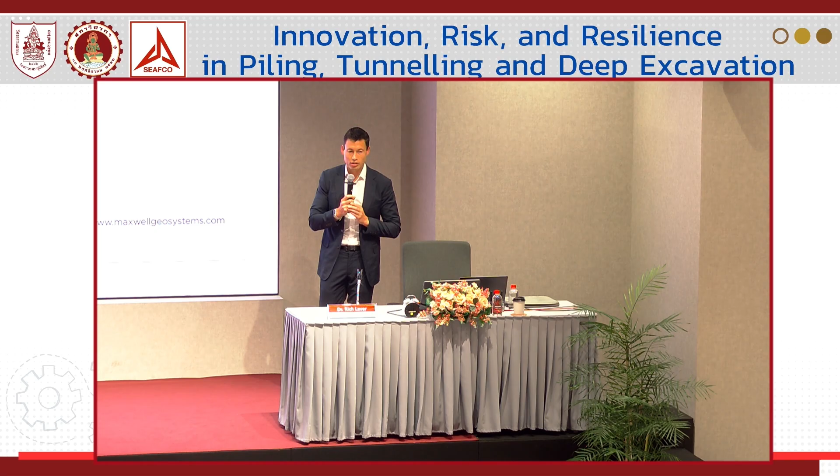I'm sorry, but you said you had zero tolerance for error - was that right? Incorrect data. Yeah, incorrect data. I can't contact you because on the left-hand side of the screen it says richlaver@maxwell.com, and your card says rich.laver@maxwell.com. I can explain that - when I first started the company, they set up my email wrong, but rather than give me a new email, they set up a forwarding one. So both will get there, they'll both work. Yes, they will. Good spot.

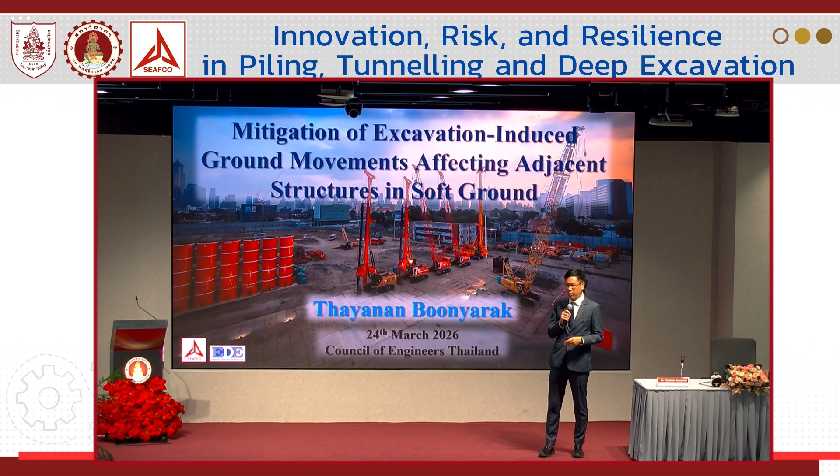As you listened to the very wonderful presentations this morning on monitoring, AI, and so on - this one will present how we could reduce excavation-induced movement on the wall and adjacent structures. Here are some of my contents. I won't read them all, as I have a lot of slides and need to fit them within 25 or 30 minutes to keep you away from very bad traffic.

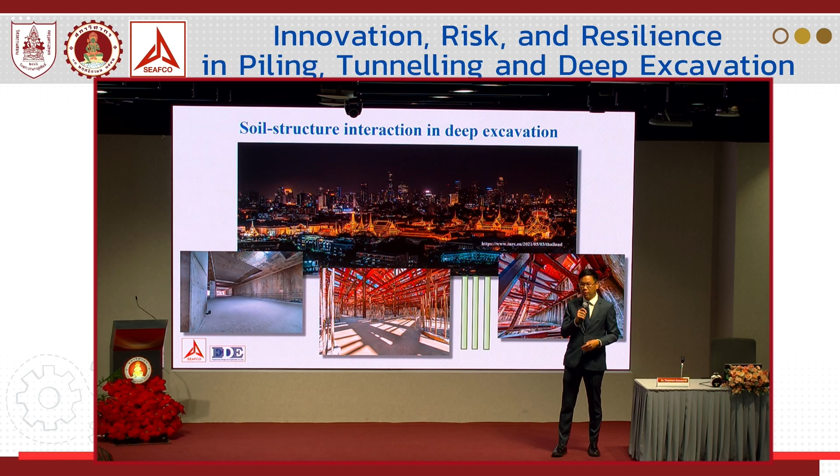Here's a typical construction in Bangkok, whether we do bottom-up on your left or top-down on your right. As we can see, Bangkok and many cities are very beautiful on the surface, but it's a philosophy that we try to make everything become very messy underground. Soil-structure interactions always happen when the superstructure or any other underground structure is built first. When you have any changes in stress, it causes ground movement, which affects the other structures through stress change.

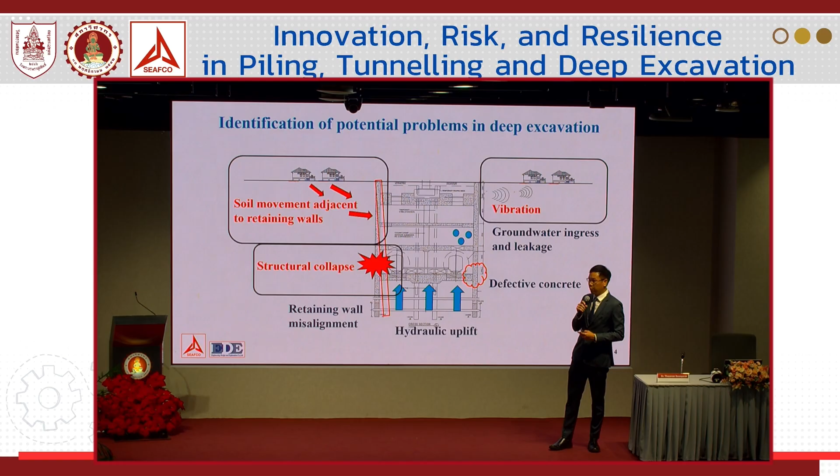So I have listed some possible problems on deep excavation. Actually, they are from large to small. It could be worse, like we have seen in recent years for structural collapse, but I won't be talking about it today. It's still too hot to talk. We will just wait for it to cool down a little, like what we have seen with Singapore Nicoll Highway. It took 10 years for them to release a report. So for the recent case in Thailand, we may just need to wait for some years.

And there is some soil movement close to the retaining wall that would affect the buildings. Some misalignment of retaining wall, but I would not talk about it. Hydraulic uplift: Professor Nopadon already gave a lot of information about that, and Kunarong already presented about concrete in diaphragm wall and bored pile. So I will just touch a little bit on vibration. It wouldn't cause a structural failure or any cracks, but this kind of small thing could make people stop you from working. They would just make noise on social media, go to the district office and stop your work easily. So even a small thing I would like to emphasize today.

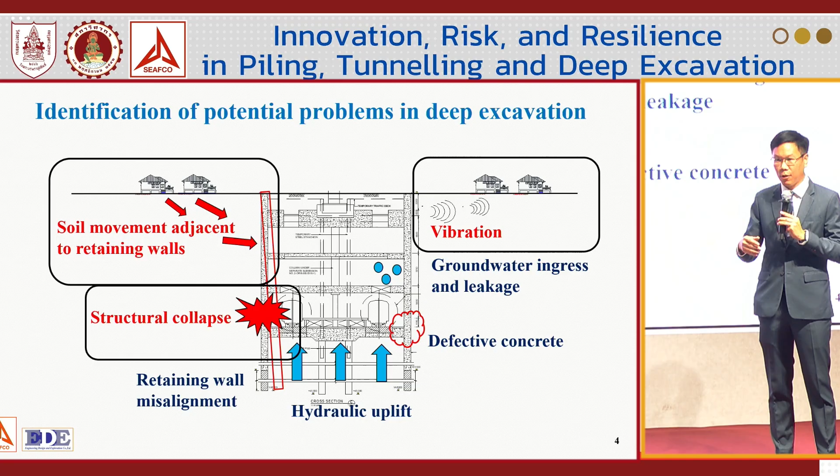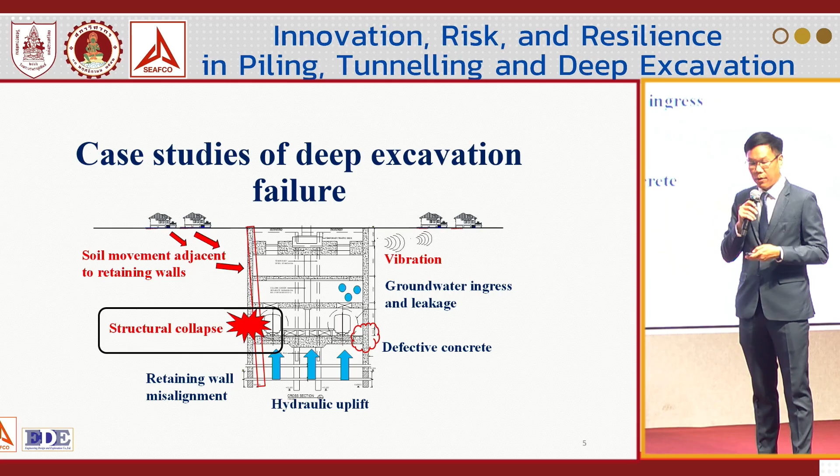So we will go for the very obvious and very dangerous one, structural collapse. It's not like every year's incident, but it still happens from time to time. To start with very early days, that was in 1997. Maybe there are young engineers here; some of you were just born. It was one of SEAFCO's projects. Kunarong may be a better person to deliver this information.

So SEAFCO was the one awarded to do the diaphragm wall to make a shaft for a pumping station. The shaft was constructed almost circular, but with a polygonal configuration. That means it's not a closed loop excavation, not like a normal shaft like Professor Nopadon presented, where they do the caisson thinking that there's hoop stress to transfer. So in this irregular shape of excavation, there will be a compression force acting on this edge, on the circular one. So they used temporary struts as the bracing system.

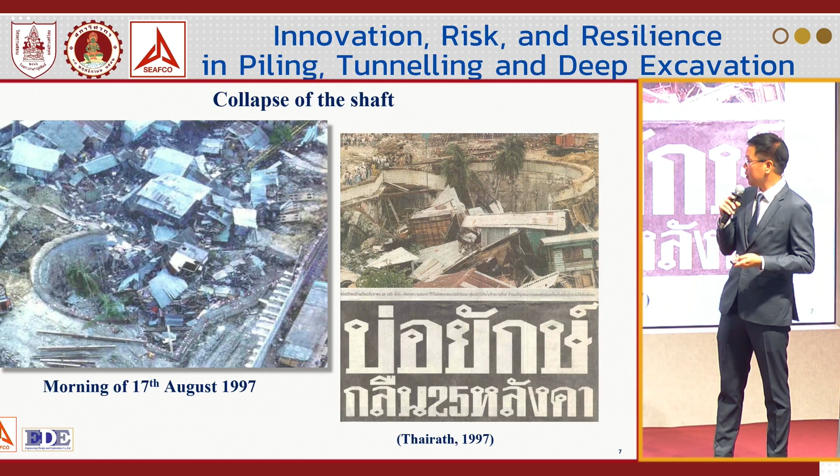This is what happened one morning, 17th of August 1997. I learned from Kunarong that nobody died, right? Nobody died because the people here had just left their houses to go to work, and then it happened very fast. So 25 houses were buried underneath this pumping station, which was almost completed. At that time, a previous engineer who worked before me, Kun Bin, and Professor Pornpot went to the site. After that incident, there was an investigation. Many people tried to blame SEAFCO, saying the diaphragm wall was not good enough. So we traced back what really happened.

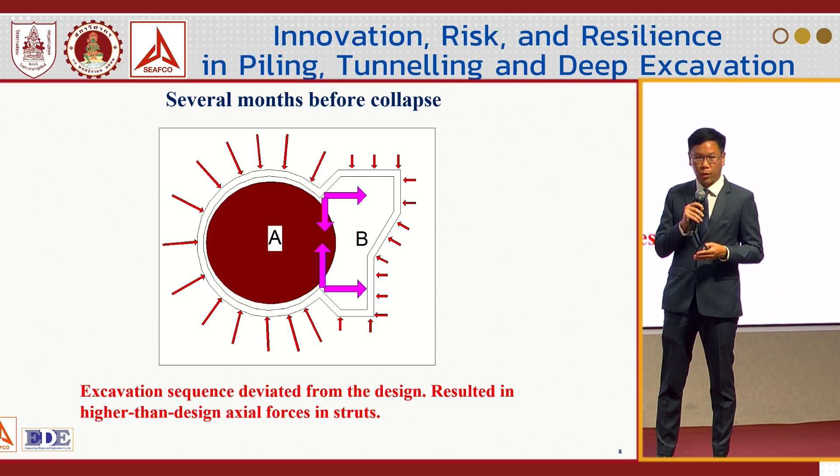Several months before the collapse, the excavation was designed to be excavated uniformly on both A and B sides. But as a typical excavator or contractor, they would do the easiest one, or the one they could excavate faster to gain production in order to claim the money. They are measured by volume of excavation. So instead of excavating A and B uniformly or in parallel, they focused mainly on the bigger pit. This caused the hoop stress to exceed the original design. When the B part was still full of soil and the A part was excavated deeper, the force acting on the strut was already much larger than the design.

And the worst thing was there were supposed to be 10 layers of struts. But on this day our former engineer went to the site, took this photo and found that the excavation had already reached the final depth. We can see this is sand, and there are coupler connections for the wall and slab connection, exposed already. And we found that 3 layers of struts were missing. So with the wrong sequence of excavation and 3 struts missing, it was all overstressed and it just happened. They might call it bad luck. People might think they were designing with a factor of safety like 1.6 or 2, but probably they used it all up, and then the collapse happened.

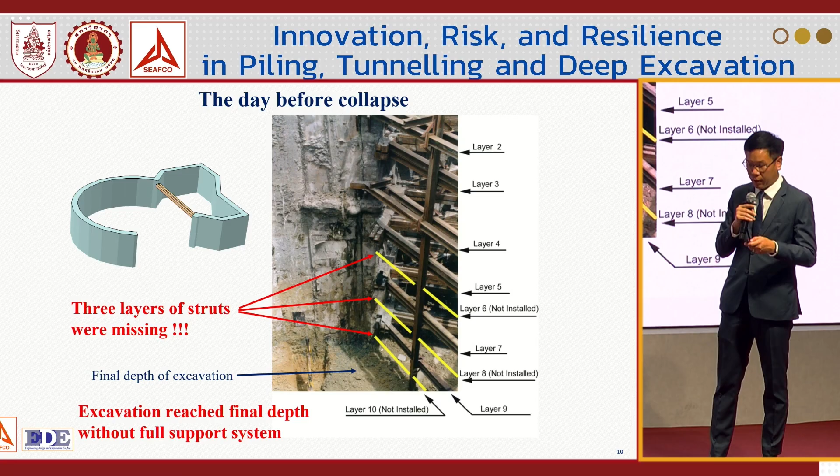And what we learned is: for any modification, just ask the designer before proceeding to anything, and ensure the proper installation of the struts. And really use a robust monitoring system, really use the data, interpret it, and see that it's a warning. I don't want to mention many projects in Thailand, but there was a TOR to read the monitoring system and the data, and they just leave it in their drawer forever. So if the engineers there really tried to foresee the problem, this wouldn't happen.

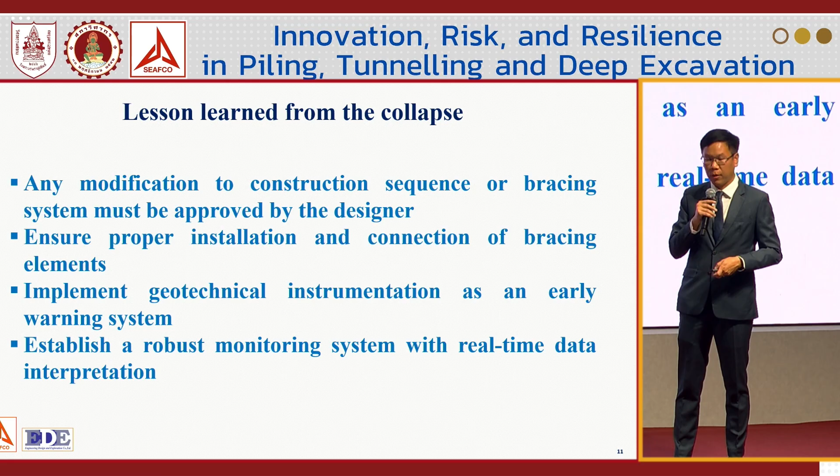And I move from a very long-term project to a recent one. This happened in China in 2019. So not just COVID happened in China, this happened too. It was a deep excavation in Nanning, China. The construction was excavated using soil nails on 4 sides.

The 3 sides looked okay, no sign of excessive movement, but this kind of problem happens, and they discovered the sign of the failure just one day before. A wide crack of 0.4 meter was observed only one day before the collapse, so that was too late. One day means they have to evacuate people and just hope that it doesn't extend too far.

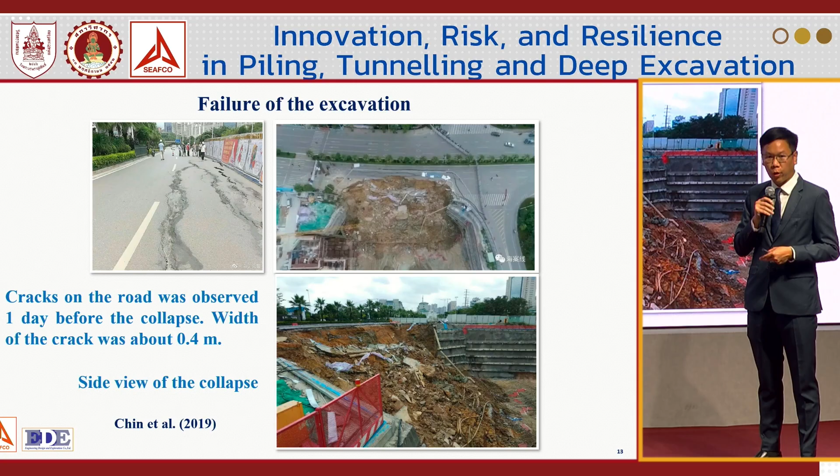So this is what happened. The municipality assigned, I think, a very advanced team of Chinese academics, with Professor Chin as the leading investigator. They came up with a report, I think within 1 year of the excavation. They found out that the excavation was done in sand, mudstone, and siltstone. Looking at the geology, it's supposed to be strong enough to withstand the force using the soil nails.

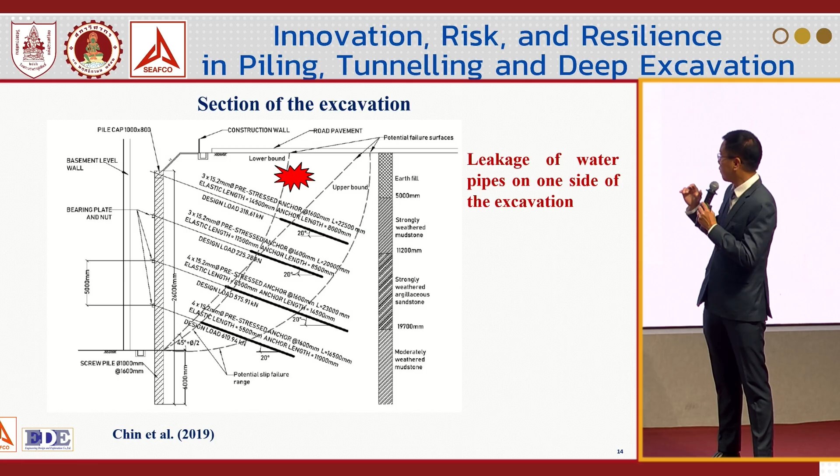But what happened was there was a water pipe that caused a very huge leakage. And that leakage increased the water pressure, and also these mudstone and sandstone, when they encounter water, it caused weakening. Some of the cementation was destroyed by water because some cohesion was apparent cohesion. They are good in the dry or with suction. So once it's saturated with water, the strength was not enough, and these were the expected failure planes.

So what they learned was there was inadequate information on the existing pipe. They don't know exactly, but some movement might have caused the cracks in the pipe, and that leakage from the pipe increased the water pressure and also reduced the soil strength. And with the instrumentation, if they provided it well enough, if they could see the water pressure build up rapidly, they should be able to interpret and foresee something. But once they discovered it, it was too late, only one day.

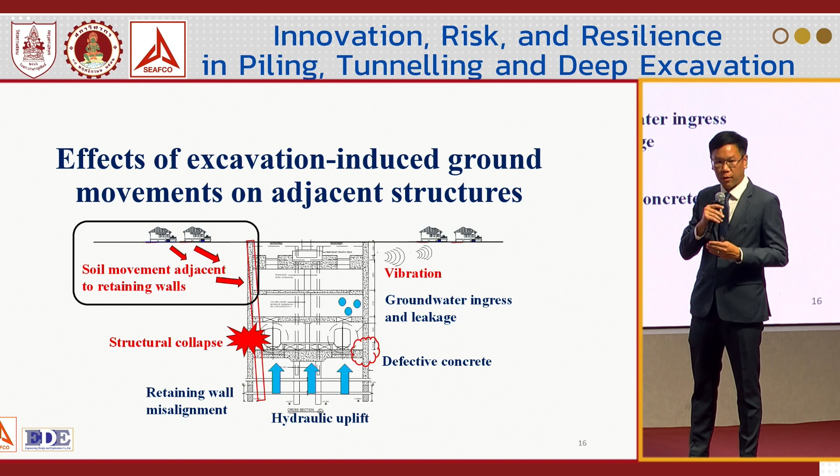So this problem doesn't happen much, but as Ajahn Nopadon and Rich already mentioned, last year we had many incidents of collapse. So I will move to something that happens almost every day: excavation-induced ground movement on nearby buildings. This is one of our projects. We installed some inclinometers and observed some cracks on the wall and also on the floor. That is normal physics.

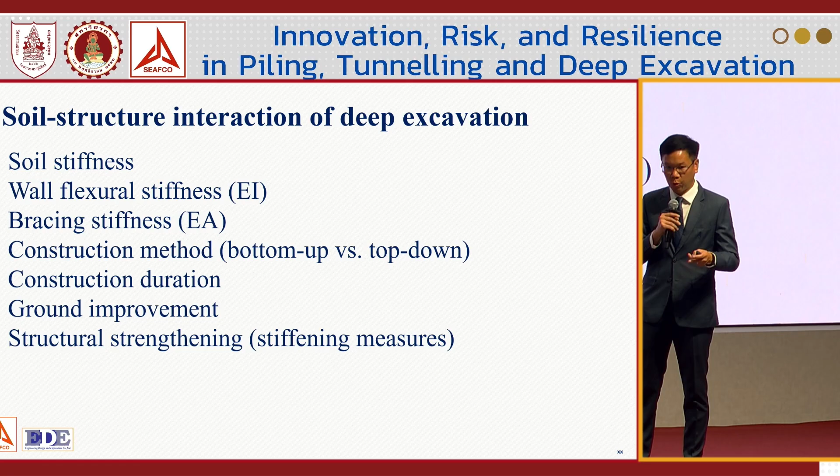When you release the load, you do the unloading, so the pressure is on one side, it's unbalanced, and when you replace it with something weaker, a strut or wall that is not strong enough, movement occurs and that causes further problems on buildings. So these are soil-structure interactions that should be considered, but I won't go through them all. Mostly it's soil and structure stiffness, how they interact with each other, and the method of construction we select. We can even strengthen the existing structures to prevent collapse or cracks, or do ground improvement. I'll go through some of these by showing some examples.

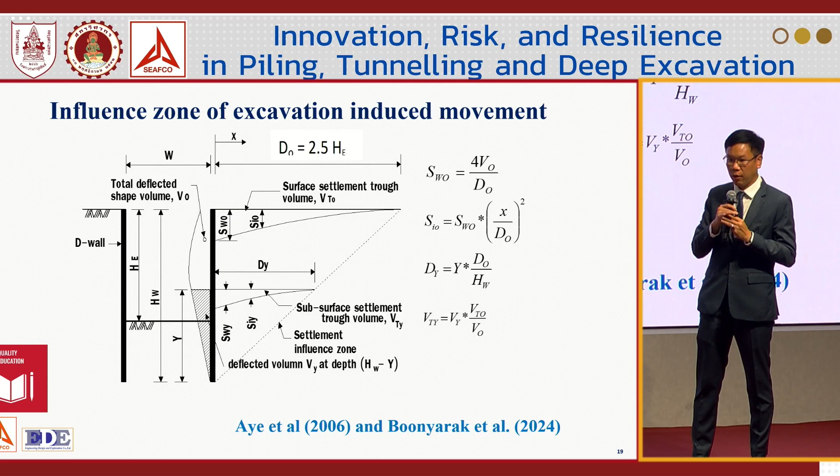As Kun Saw presented this morning, this is the influence zone of excavation, which extends about 2.5 times the excavation depth. And according to the DPT, the Department of Public Works and Town & Country Planning, any buildings within 3 times the excavation depth have to be monitored and calculated for the effect of excavation on the nearby buildings.

For numerical analysis, normally people will check the strength, forces in walls, movement, settlement, and stability for factor of safety. And in order to see what happens on the nearby buildings, we have to model the structures. We cannot mimic the whole building, it might be too complex. We might try to model the major structure like beams, columns, and piles, whether in 2D or 3D. Computation is now very powerful.

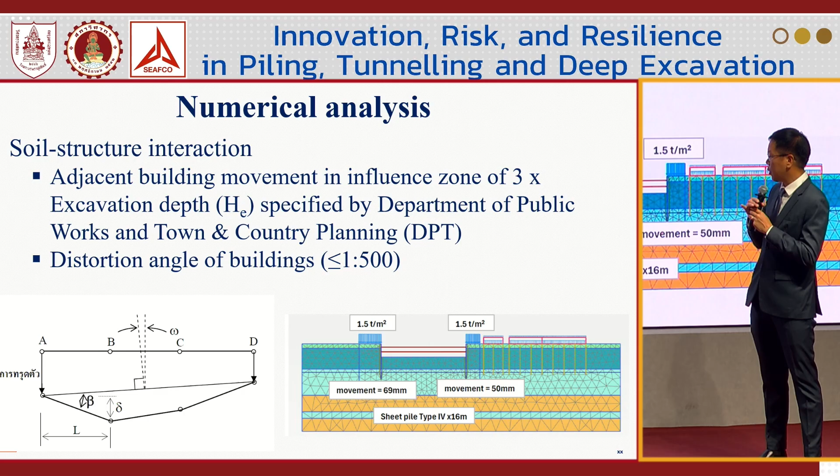Only, we engineers should not be too happy. Once we receive the data from our analysis, or even AI like what Rich just showed us, we have to get some verification of those numbers. And in Thailand, we specify that the distortion angle of buildings cannot exceed 1 to 500.

So once we calculate, we'll set up the trigger levels and also the planned observational method, whether we are going on the danger zone. That means we have to put more countermeasures, for example, reduce the spacing of the struts and do zoning excavation.

Or we are going on the too conservative side, I mean going on the green line, that we know that we are too far from our prediction. That means we can relieve some constraints, for example, going faster, or even you can remove some struts if the data really show this way, that you are too far from the design line. So the instrument is very useful for a geotechnical engineer.

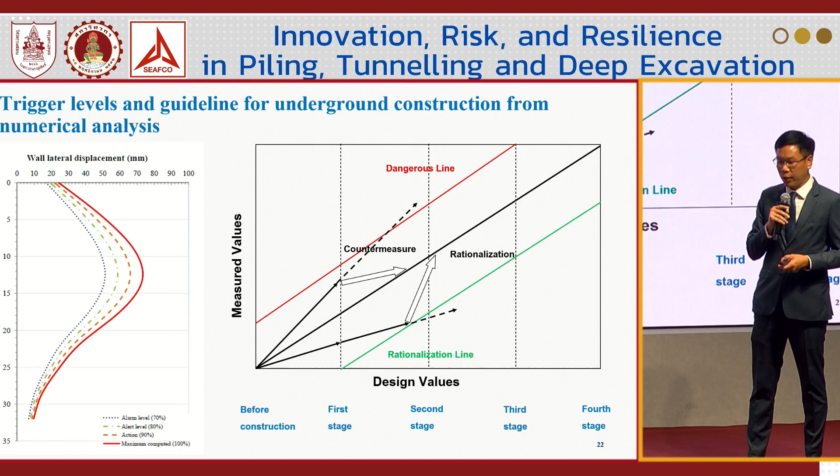There are not too many projects in Thailand, that I don't want to mention, where they just read those instruments and put them in the drawer. Actually, it helps us to verify the field performance and ensure safety. And when you have to go to the court, it really minimizes the dispute among the stakeholders, whether those houses will blame it on you or on whatever else. So that instrumentation can be very strong evidence. I mean, if we are doing something wrong, of course they have a right to sue us.

And I will show some of the data analyzed in a study between 2010 to 2022, where we collected the data from more than 50 projects, mostly diaphragm wall, because SEAFCO is mainly working on diaphragm walls, so we have a lot of diaphragm wall data. But we are also extending to some projects, like Kun Rong said, we had the Tom Yam Kung crisis. So there were not many projects, so we had to go for other shallower excavations.

So we are presenting here sheet pile excavation, pile wall excavation, diaphragm wall, and some diaphragm walls are very thick, like John said. We had some data from a 1.5 meter thick diaphragm wall. That was for a subway station. And we have data from bottom up and top down, but I won't go into all details as time is limited.

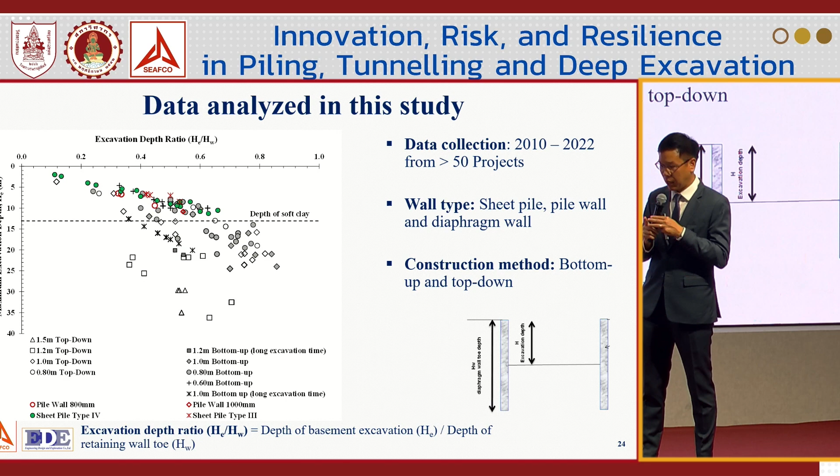So as we might already be able to predict, more rigid walls will end up with smaller movement. That is a normal trend. But I would like to show this graph for our young engineers, that you can use this one for verification of your numerical analysis, whether they are in line.

So from the analysis, the thinner diaphragm wall for rigid walls, anything thinner than 0.8, for example 0.6 meter thick, the movement would be quite large, as well as pile walls. That movement could be more than 0.5% of the excavation depth. That, from literature, is considered rather large.

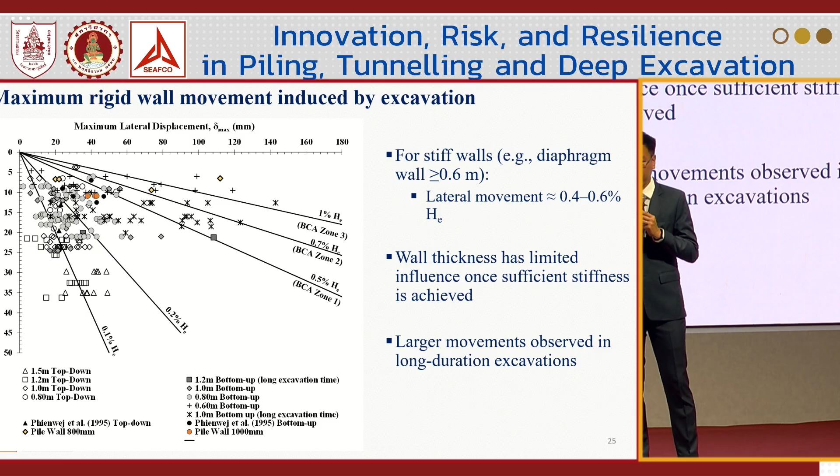And for the wall thickness, once you increase the EI, or flexural rigidity, once the wall is thicker than 1 meter, it doesn't have much effect. And also, there's another effect, time. As we excavate in clay, either soft clay or stiff clay, once you let the wall stay without bracing... there was one project where the excavation was very long, the size of 5 or 6 football fields on plan. So the excavation time was very long, and the span of the bracing was very long. So after you leave the wall for too long, the movement just increases with time as well.

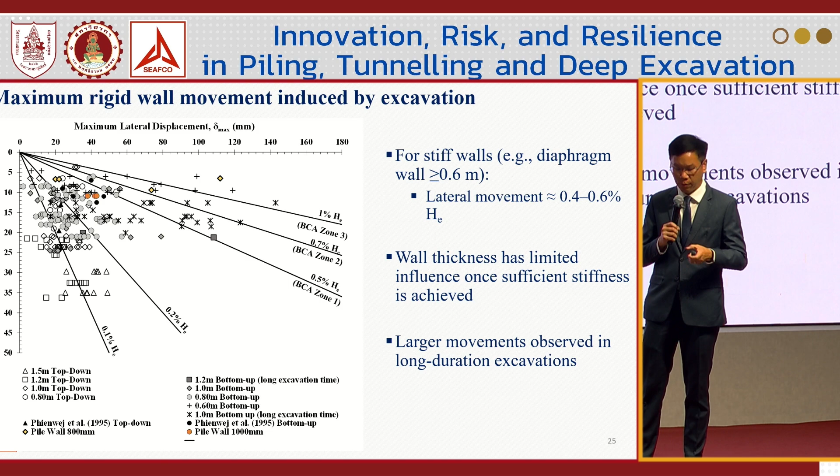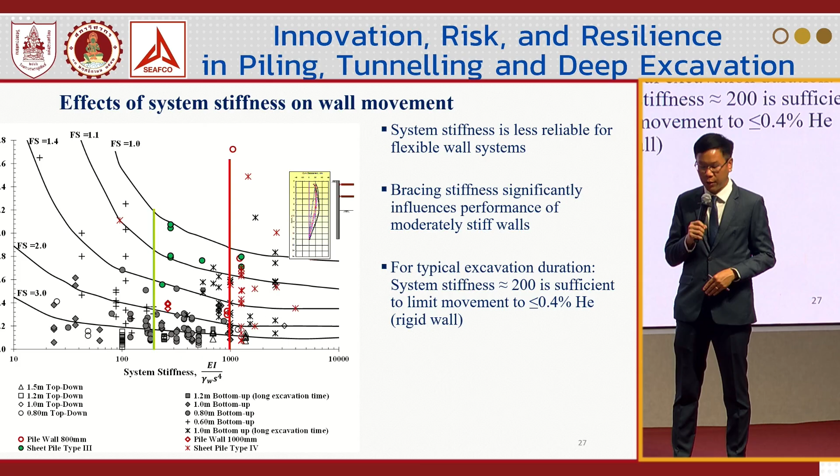And there's one number that people like to use, which is system stiffness. I think it's widely used in the UK, if I understand correctly. It's a good number: the top one is the wall flexural stiffness, EI of the wall. So a thicker wall gives larger flexural stiffness, divided by the spacing of your bracing. So from its physical meaning, it's quite straightforward. If you have a smaller spacing of the bracing, or a thicker wall, you have larger system stiffness.

So what this graph shows you, I will start with a rigid wall. On the low side of system stiffness, once you increase it, the movement rapidly decreases. But once you reach one threshold, from my data it shows at about 200, you are not improving anything. You are burying your money into the ground without getting any improvement. So for a rigid wall, a number of 200 would be sufficient. Anything beyond that is a waste of money and time for construction.

But on the other hand, for a flexible wall, even if we try to increase the system stiffness up to 1,000, we can see the movement, or this line, the factor of safety against base heave, still increase, and you can see the variation of data. So the system stiffness itself originated in the UK, where they mainly use rigid walls, and it comes from stiff soil, not soft clay like in Thailand. So be very careful from this graph not to just use system stiffness for the flexible wall. That varies by many factors, as I mentioned in the earlier slides.

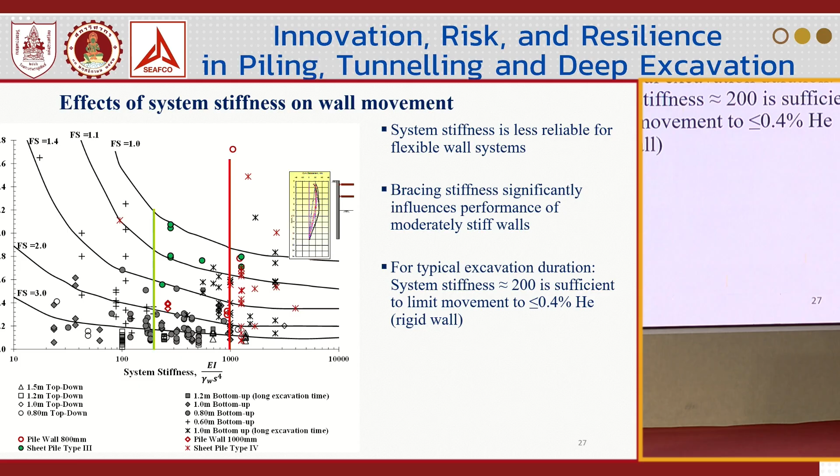And there are some measures to reduce the movement, like Professor Noppadon already mentioned. We can improve the ground. Because once you add cement to the ground, the stiffness increases. Normally, as a rule of thumb, the strength will increase by about 7 to 10 times the original undrained shear strength. And so does the stiffness; normally they go linearly.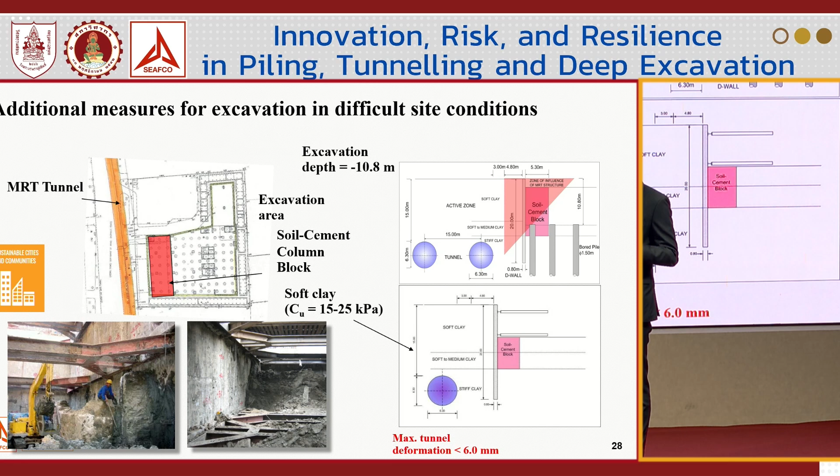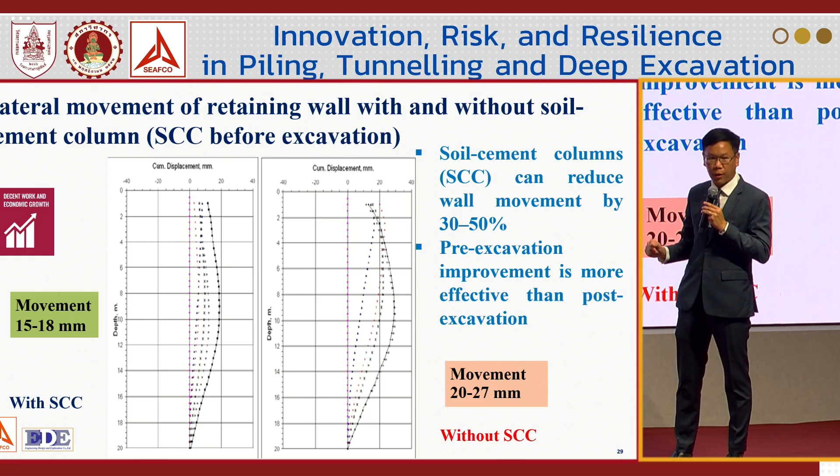We improved the ground with a soil cement column block on the site next to the tunnels, shown by this orange line. So by comparison, on the left is the movement with the soil cement column, and on the right it's without the soil cement column. So from this, we can see that adding the soil cement column can reduce the wall movement on the opposite side by 30 to 50%, given that you do that before the excavation starts.

I'd like to show one example. This one is a bad example, actually. They did the excavation up to a certain level, and they found that there was water leakage through the gap of the diaphragm walls. The diaphragm wall was not watertight enough. Water flow visibly, you can see it flows into the site. So what they did was high pressure jet grouting on this yellow and orange area. And once they did the jet grouting, it made things worse. They opened up the gap and caused a larger wall movement.

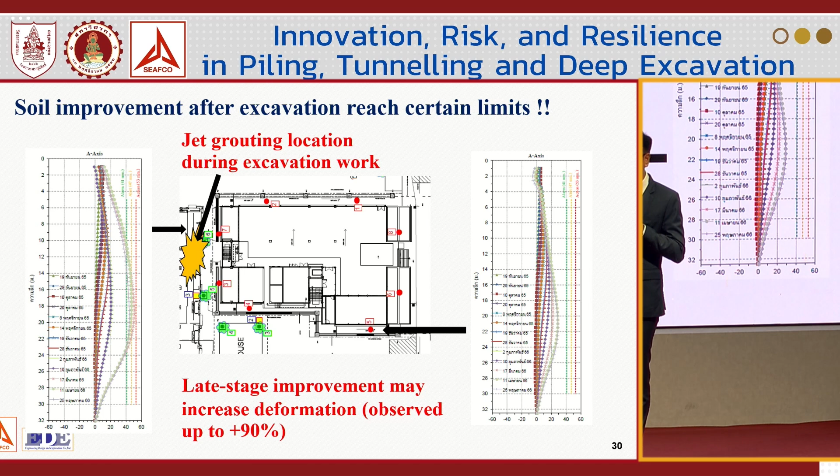So from this one, the late stage soil improvement by high pressure jet grouting increased the movement by as much as 90% compared to the other side without the jet grouting. So just be careful. If you read papers and see soil improvement works, just check the context in which it really works.

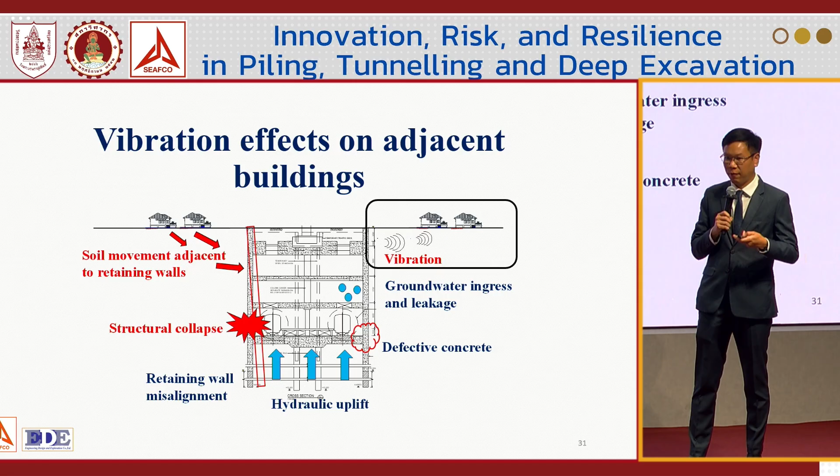And I will move to the smallest damage part, but it could cause big damage if people raise their voice. It's vibration. So in Thailand, there's an announcement of the Pollution Control Department that there are 3 types of building. For certain types of building you have to go through what we call the environmental impact assessment, or EIA, and you have to control your vibration within the limits for each type of building. Type 1 is commercial, so they don't mind; even a large vibration of 20 millimeters per second is still within the limit.

But more sensitive buildings are types 2 and 3: residential, school, and hospital for type 2, and historical structures or preserved buildings for type 3, where they limit the movement to only 3 millimeters per second. And what is 5 millimeters per second? If you see your glass full of water shaking, that's already exceeded, it's very low.

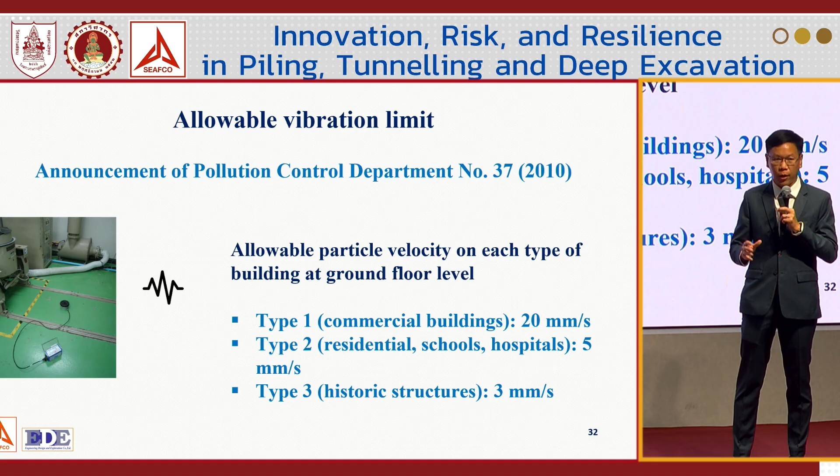So the glass of water on the left, I just took it in my office. So we are a piling office, so we're testing our machines every day. So I'm used to it. So I don't mind 20 millimeter. So what? Yeah, not a big deal. But some people complain. And once they complain, and if they really measure the data, it exceeds 5 millimeter per second of the velocity. So once that happens, they can stop our work.

So we have to find a way. So Kunarong tried to have a new idea to construct, because we are working near sensitive houses all along. If we don't try to do anything, the first option is to go buy many equipments from abroad that maybe cost like 5 million per set. And imagine we have like 50 sets of machines. We have to buy these sets. That would cost a lot of money.

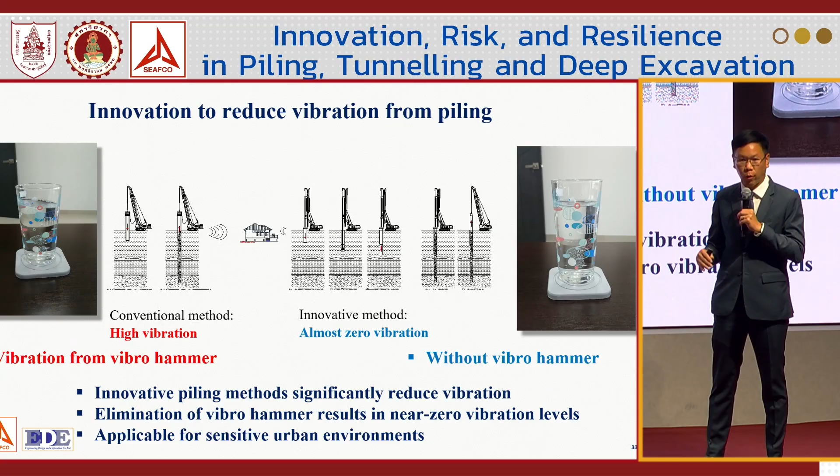So Kunrong and SEAFCO and the R&D team came up with an innovative method. I probably won't go into detail, but we invented the method by not using the vibration or vibro hammer. We do the pre-boring and add the counterweight to nicely push the casing down. And once we invented that, we already got the Thai petty patent, now in use. So we are using this for what we call low vibration piling in Bangkok.

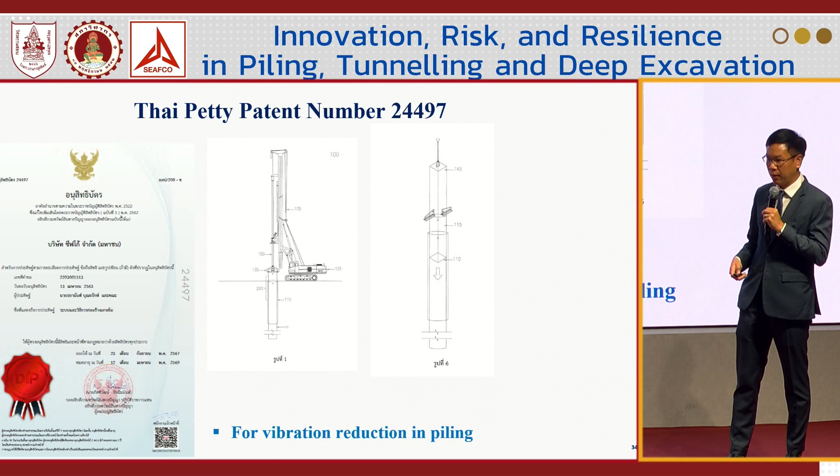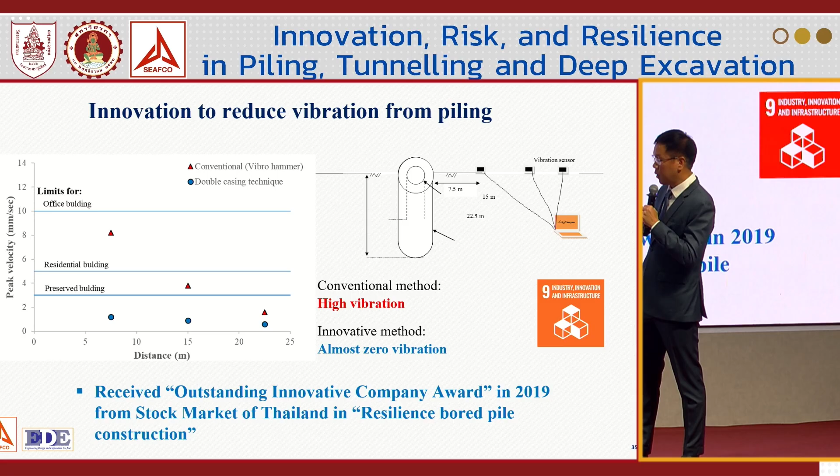And this is a figure to show: the red one was our conventional data that we used a vibro hammer. So it's like a normal hyperbolic curve. Further from the vibro hammer, the vibration gets smaller. But it's a very common case that the piling could be very close to the neighbor, as close as 2 or 3 meters. In some cases we had that problem. So if we still maintained our old method, we would be stopped from working because the vibration exceeds the limits. Once we use our new method, there's no problem after we got these patents.

And others, I will go very quick. Also, even making a diaphragm wall, there's a part that could cause vibration when we want to take out what is called the formwork between panels. In the past, it might take us almost a day or sometimes 2 or 3 days to really take out this, what we call the formwork or stop end. We have to use a lot of force to take it out, and that caused vibration.

I think there was one site that we worked near a kind of clinic. It's an aesthetic clinic, like for facelifts or something. So they are very sensitive.

I even made a joke, maybe we should let our engineers just do some facelifts for them so they will not sue us.

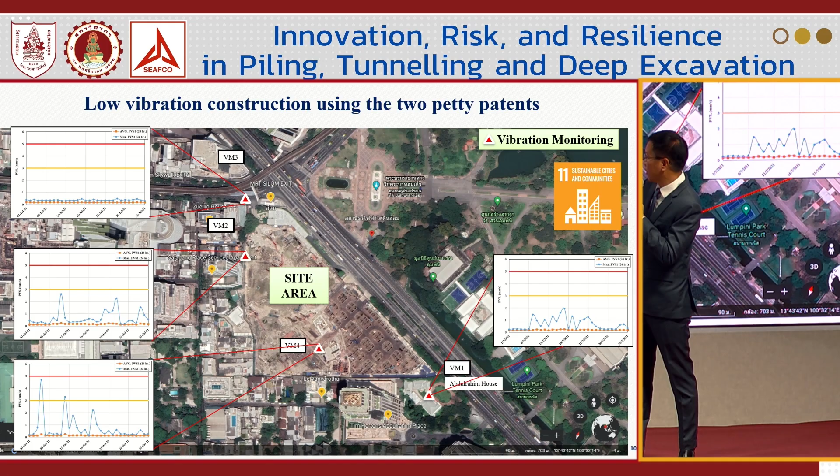This one shows the data in the middle of the site. Some vibration could exceed 3 millimeter per second because we have the trucks, backhoe, excavator running very close to the sensor. But outside of the site, and this one is a historical building that has very stringent limits, all passed the limits that they specify in the EIA.

So I will summarize my presentation. So a robust monitoring system is very crucial, also with timely interpretation so that you can foresee and prevent incidents from happening. And the database of any kind of excavation could be very useful for your future work or for academics, if we share among our society, that could prevent disasters, for young engineers to learn from.

And for selection of the wall type, construction method, and system stiffness, I think we should do the optimization, not go for really conservative, like John said, people nowadays go conservative just to hide away from those uncertainties. And vibration impacts can be minimized using a good technique.

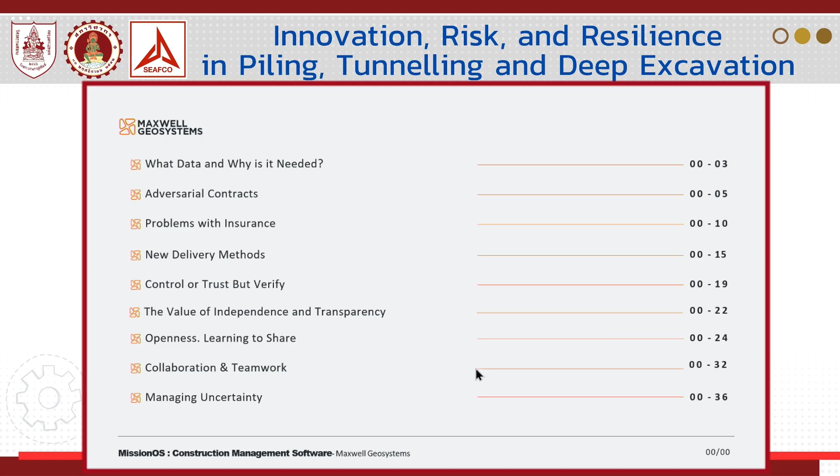Well, what data is all data? We need all data from construction, and particularly we can put this into some buckets. We're talking about the context of construction, geospatial setting, factual geology, groundwater behavior. We're looking at surrounding infrastructure, in particular utility, knowing where they are, knowing what condition they're in, their sensitivity, background behaviors - is my ground already moving or my building's already moving - environmental factors, and then being able to quantify the risk in construction.

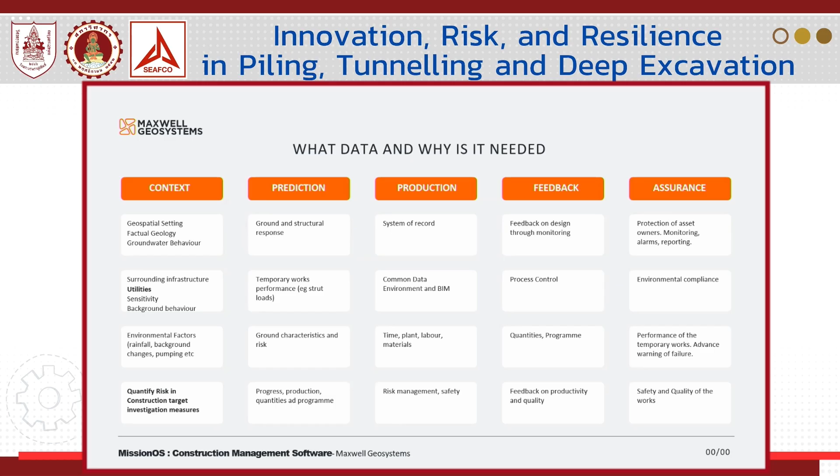And then target investigation measures to make sure we can quantify that risk. We need prediction, we need to know what normal looks like, both in terms of how everything is normally moving, but also what we expect a design to do when we actually build it. And then we need to be able to predict things like progress, production, and quantity, so we can see when things are deviating from our expectations.

And then when we get into production, we need to have all those records, the records as built, and we don't need them done 2 months after the event. We need them done actually at the time of the works, so that we can draw conclusions as to what my expectation was versus the reality, and look at why there's a difference. We need to use this data to feed back constantly on the excavation process, particularly in things like TBM tunneling, which can be very rapid, and also with SCL or SEM tunneling, where things happen very quickly. We need that rapid feedback on the work, not just in terms of design, but in terms of production, in terms of quality. Are we achieving what we said we'd achieve?

And then ultimately, we need assurance. We made promises to people that we can build this without causing damage. We need to be checking the whole time and keeping all those surrounding people confident that we can do what we said we'd do. So that's the assurance. And there's lots and lots of data, and too often this data is held in separate little systems all over the place. The engineers don't have the time to be able to constantly get the data from these different separate silos and put it together into one place.

So where did this all start? Oh, and by the way, on this data - this is all data that is your data. It's the data that you observe, you keep as you go from project to project. So it's very essential that you make sure you keep it safely, that you can use it in the future.

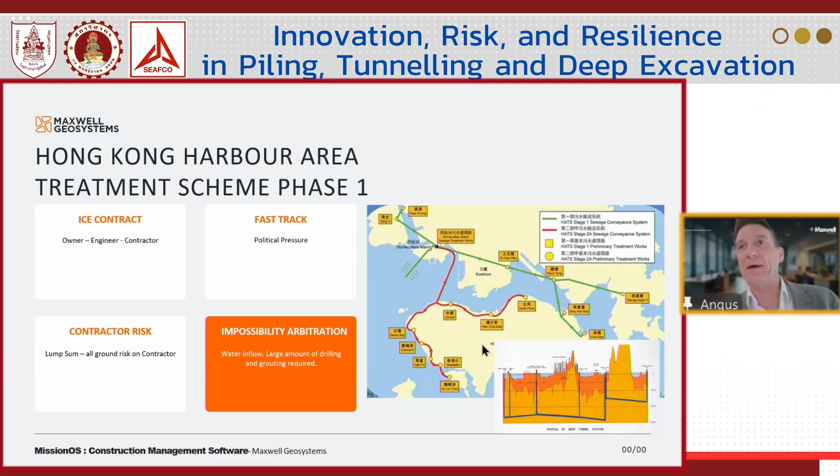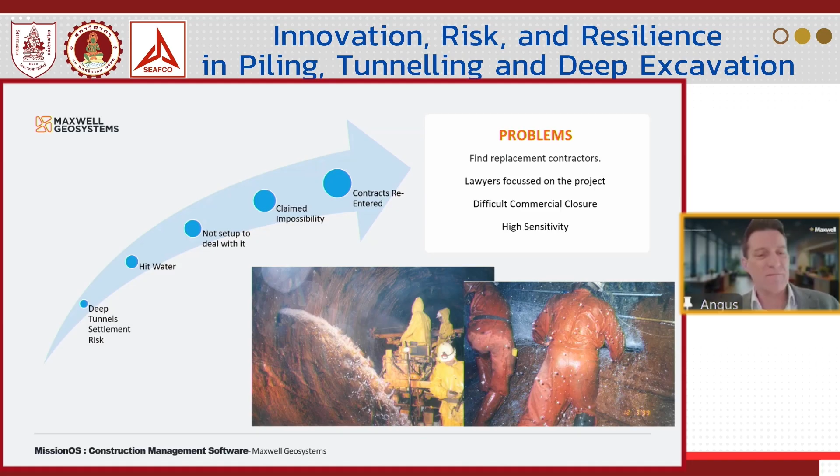It was a deep tunnel network, inverted siphon, as you can see here, into the rock. And unfortunately, they had a lot of water. And what happens when they hit water - they really weren't set up to deal with it, claimed the impossibility, the contracts were ultimately re-entered, not good for anybody. And problems that ensued from that were that we had to find replacement contractors. By that time, the lawyers were all over the project. Because of the scrutiny, there was difficult commercial closure going forwards, and very high sensitivity from everybody on the project.

Now, at that stage, I recognized that data was going to be key. We've got an arbitration to solve, we've got another contract to continue, and we've got to do that with lawyers looking all over it. So we put in place a thing called a tunnel data management system. This was 30 years ago now, and this was aimed to be a common data environment implemented by the supervising engineer. All records, everything, all photographs, all time - everything was in there.

Single source of truth, fully audited. So if the timesheet said probing was done, there was a probing record. Always up to date, always accessible to everybody, and in forms that everybody could use, which was great. And the great thing about that was that the outcome was that, hey, we can start doing some really useful analysis during construction of where things are going. We can start making predictions. We can start looking at opportunities to do different things.

The settlement of claims, even though the lawyers were looking all over it, because the data had been agreed at the time, all we were doing was arguing the interpretation. So that actually made the process of claim settlement much, much easier. Ultimately, the client, the owner, our client, won their arbitration 3-0. There were 3 tranches, they won all of them.

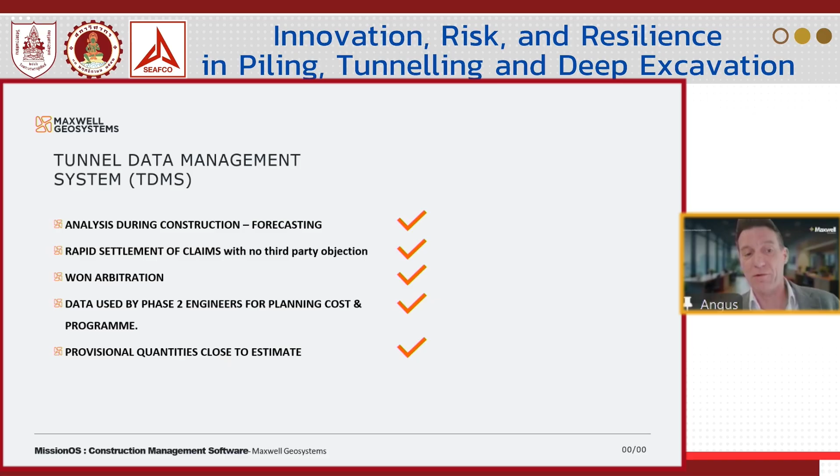The data was then used by the phase 2 engineers, in this case AECOM, to plan phase 2 because of all that granular data. Why use a vertical borehole for a horizontal tunnel when you've got a horizontal tunnel you can use? So you've got all this data, every single meter of tunnel has information. And as a result of that, using that data, the provisional quantities on that second phase came in close to estimate, which was good - for a big drilling and grouting job, that's pretty good. So it gives you a lot of certainty in having that database to use.

So back to the early 2000s, problems with insurers. I'm sure everybody remembers this - premiums were increasing. This is actually Kaohsiung, and this is Heathrow Express around about the same time. There was also a downturn in the construction industry globally. It became difficult for insurers to insure jobs, so premiums were increasing.

Some reinsurers threatened to leave the sector due to unacceptable risks. This really was existential for tunneling. And what they did was the British Tunnelling Society and the International Tunnel Insurance Group got together and said, listen, what we need to do is formalize the way risk is managed on construction projects.

So they came out with a code of practice. This code of practice set out the processes for identifying risks, quantifying them, and designing out or mitigating risk on jobs. It implemented a permanent risk manager role on projects, a constantly updated risk register, and set verification processes.

And made sure that risk was data-driven. So in the recent versions, they've been quite clear in their section 6 that computer systems need to be there, which recognize uncertainty, try to quantify uncertainty, and try to remove human error from the system by using the data. This increases transparency, and also invites independent review into the whole process of managing risk.

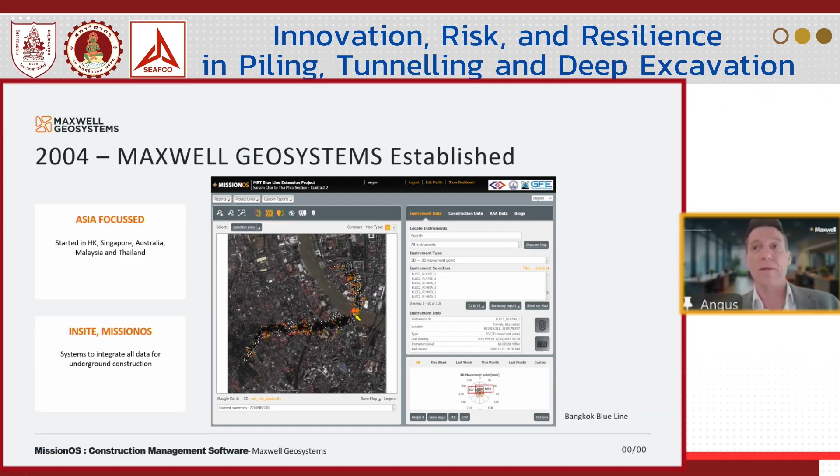So going over to 2006, what happened was that the TDMS, the system that I created back in the late 1990s, was written into the specifications in Hong Kong. So as part of the quality management records, they required tunnel data management, which asked for all those things that we had previously done, which was great. So we did a lot of these.

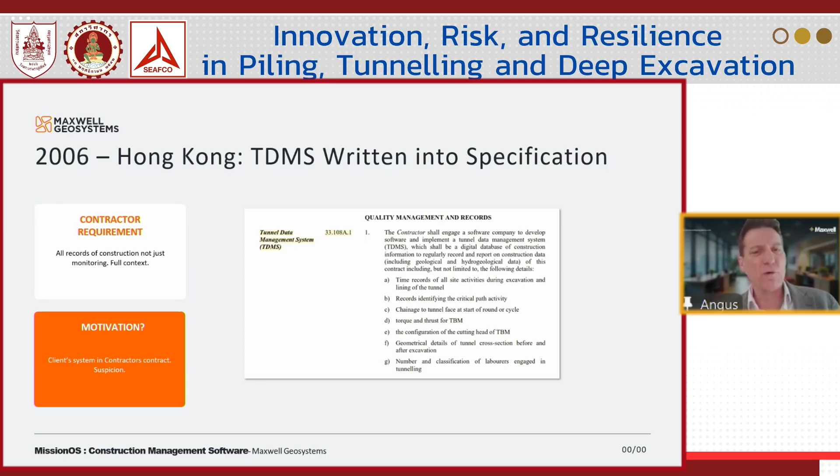The only issue was that because this was written into the contractor specification, you imagine an owner's system put into the contractor's requirements. Contractors thinking, I'm not sure I like the idea of having all this data available for the owner. So it took a while for people to get used to that. But we did do a lot of systems in Hong Kong.

And now what we're finding is as people get used to this, they're much more open. They recognize the system, the records need to be there, and they do provide them in good time to the owners. And this is a huge resource, obviously, for the owners, the government, and the MTR in Hong Kong, of data that they can use to plan future projects.

So after about 2006, we started seeing a number of new delivery methods. By that, I'm talking about alliancing. The MTR and Australian roads use alliancing quite a lot. And within these, you have a target cost. A target cost means that you set an initial budget, and then you agree a cost, a target cost, with the contractor by getting them in early.

They started looking at public-private partnerships, and the Airport Link in Brisbane was a case in point that we worked on. The problem with these—I'll say the positive first. The positives were that cash flow was agreed to meet project challenges, so nobody was looking to blame anybody. There was a problem job, you just fixed it.

So it was great for engineering. Problems were engineered out, and certainly recognized and managed. Observational engineering was welcomed on projects. As a result, good systems were an investment for the project. So everybody said, let's get good systems in place. This is good for the project. We can do observational engineering, we can do feedback, we can do things better.

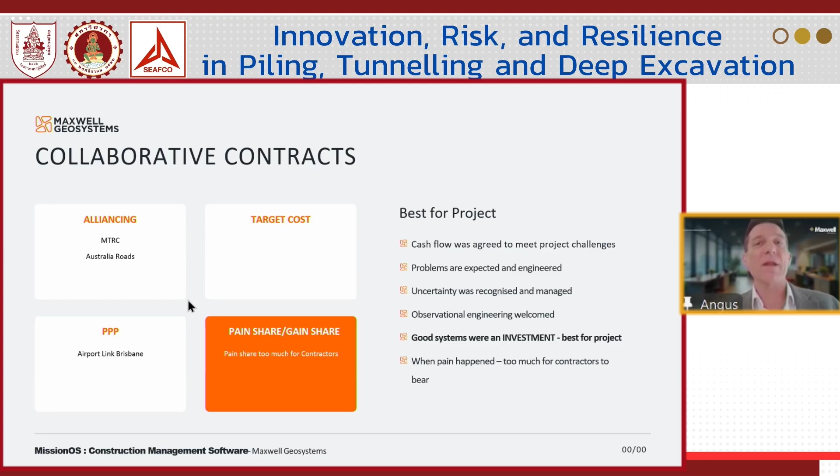The reason these didn't go forward was that when pain happened, these were all pain share, gain share forms of contract. When pain happened, it was too much for contractors. And I can tell you, Airport Link was a 20% loss, and that was too much for both Thiess and John Holland on that contract to bear. So they kind of fell out of favour after a while.

As a result, most contracts went back to design and construct. And lately, they've got this new thing called progressive design and construct, or early contractor involvement, but still, ultimately, they're design and construct contracts. So the idea was push all risk to the contractor. Now, the problem with pushing the risk to the contractor is you're not really pushing the risk away—you still have the delivery risk as an owner of the job.

What you're pushing control to the contractor. So the contractor now has pretty much all the control over the project and also all the control over the data. It does lead to the contractors coming with alternative designs, because the initial designs are often quite basic, the contractor goes out and says, I can come up with an alternative, and they will push the alternative, which further puts the control over to the contractor.

As a result of this, we end up with lots and lots of claims on projects. Now, on these projects, the systems were written in by the designer, by the owner's engineer, into the contract and provided by the main contractor, which is okay. But again, if it's written in, it's a client system in the contractor's contract. You fight a little bit of a battle to make that as open as it needs to be.

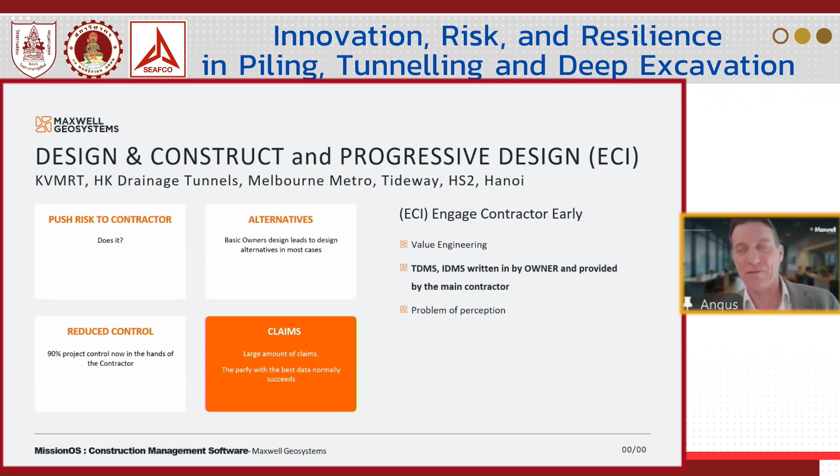And as a result of, I think somebody mentioned the Nicoll Highway and other things, certain parties came up with new ways of dealing with the risk in these contracts. And I call them control, or trust but verify. So we look at the LTA after Nicoll Highway. Essentially, monitoring was completely or mostly taken away from the contractor. So an independent party does all the monitoring. Inside the tunnel, because it gets in the way, the contractor still does some of the internal monitoring, but most of the monitoring externally is done by the owner.

If we go to the MTRC, this is interesting because they have left the main monitoring with the contractor. So he's free to engage any company to do the monitoring. But they appointed an independent monitoring consultant to do about 15% of that monitoring. So they do a check of the actual monitoring, taking independent readings to check that things are being done correctly. And the system is provided by this independent monitoring consultant.

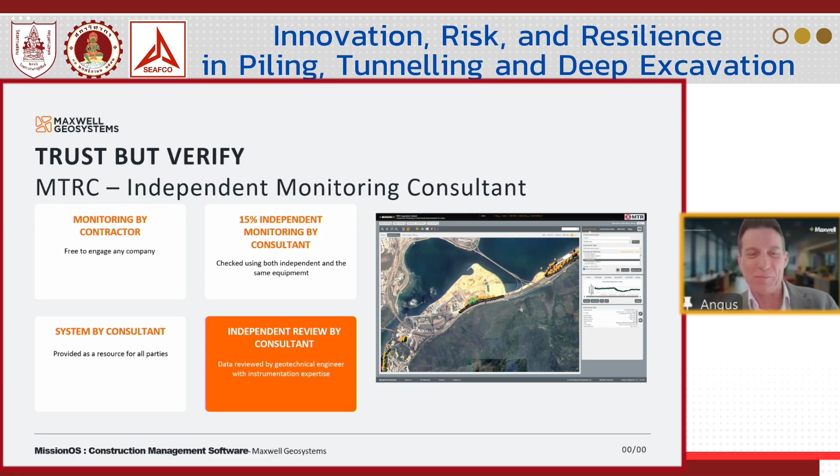And another thing, and something that Rich is actively engaged in now, is that the independent consultant reviews a lot of the data, provides that independent oversight. It removes those cost, political, and time pressures from people, and honestly, openly looks at the data to identify any anomalies.

So, the value of independence and transparency. Turns out insurers love this. In the negotiations for premiums on certainly MTR jobs, they recognise that this independence and transparency lowers the risk on the project, and it increases assurance for stakeholders, knowing that somebody else with no hand in the contract is there to look at this. And there is evidence to show that it can reduce premiums on projects.

So let's look at the 2010s. This was a process of gradual openness and learning to share data. So we started off in Kuala Lumpur on both KVMRT1 and KVMRT2. In the systems we provided for them, it was the instrumentation, the IDMS, the instrumentation data, ground data, and machine data. So the first time really it was machine data. So you got that process control coming in.

The systems here were implemented to be independent of the data producers. So the instrumentation companies weren't managing the system. That did two things. One is it gave a level of oversight, which was good. Secondly, it put the systems closer to the people who needed it. If the systems are down at the bottom with the subcontractor, there's no way the system provider can talk to the user who is the owner or the engineer or the designer. No contractual relationship there.

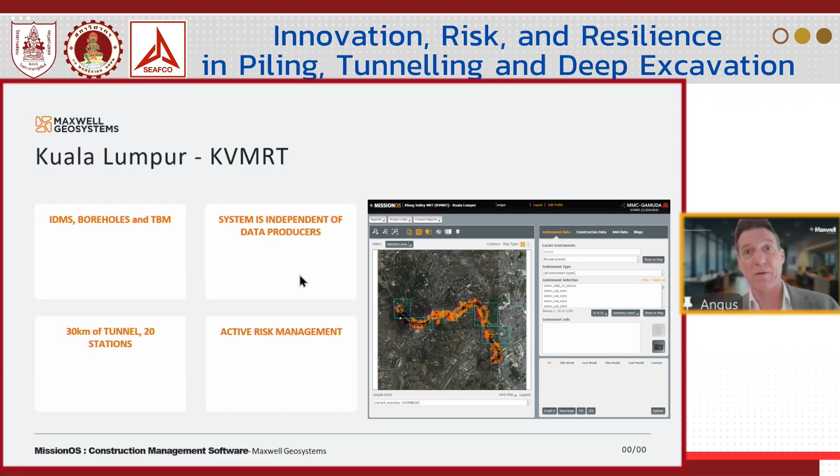This put it much further up the tree, meant that we could work with the client in this case to develop systems to minimize risk on projects, which was very, very useful. And this active risk management, this is just an example of one case.

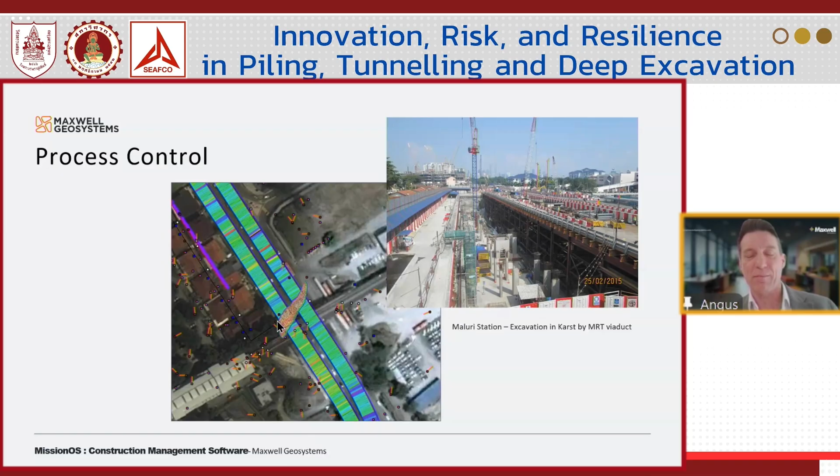And we created live dashboards. He's going across another railway here, and you can see that we're tracking the TBM parameters. You can see that the TBM actually came out of rock a little bit earlier, so just about here, not here. And you can see that they increased the face pressures as they went past this railway above the original design line as part of a process control feedback system.

So very useful to be able to have this back analysis of Gaussian settlement troughs, twin tunnels here, everything, high level of control as they went across these important assets.

To go to Singapore Power, about the same time we started with Singapore Power, 50 kilometers of tunnel, I think 17 shafts. This was phase 2 of a phase 1. Phase 1 had given them some problems with some settlement, causing some delays. Multiple contractors, 6 contractors all working on one project. If you'd left it to the contractors, you'd end up with 6 different instrumentation, 6 different systems, nothing talking to anything else, and the interfaces alone would have been quite complicated.

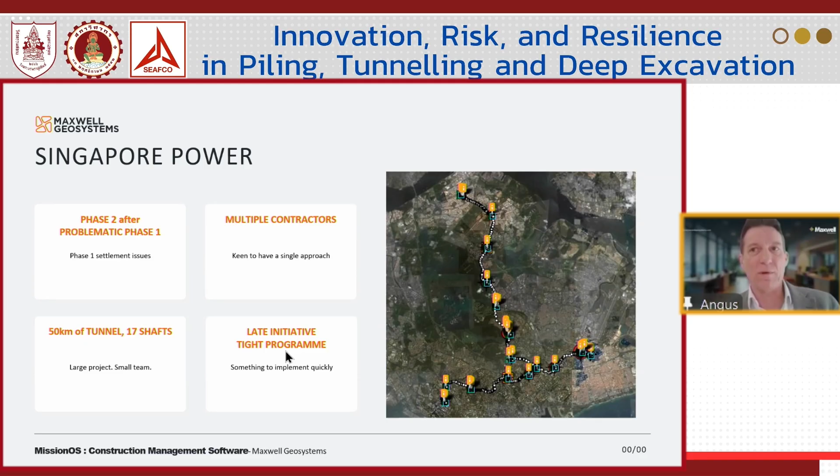So as a late initiative, what they did was something that they could implement quickly, and that is they implemented a process of sharing. Now, I've put this quote in here because this is exactly, I recall, what the project director said in the meeting. Just because I'm a project director doesn't mean I'm not an engineer. I want to be able to see for myself. So this is the thing. So the senior people said, actually, I don't want to wait to receive that. I want to be able to see it for myself.

So what we came up with was this concept of information partnering. And information partnering meant creating a charter of how information was going to be managed on the job. Clear objectives at executive level. All 7 parties share the cost of a system, and the delivery consultant will manage that system delivery, and it needed strong leadership to change the behavior.

If it's not in the system, it doesn't exist. Michael Chin said that at many, many meetings. Okay, don't bring the extra stuff, it's got to be in the system. And after a while, everything was in the system, and all meetings were run with that system up and on display. And after a while, it became very, very efficient. A number of people, I think Banjo was slightly involved in that project as well. So very, very useful, very, very quick.

And in fact, it was so successful that our original 72-month contract only happened for 55 months because the job went so quickly. So we kind of shot ourselves in the foot there, but you know, it was just a very, very good job. Went very, very well.

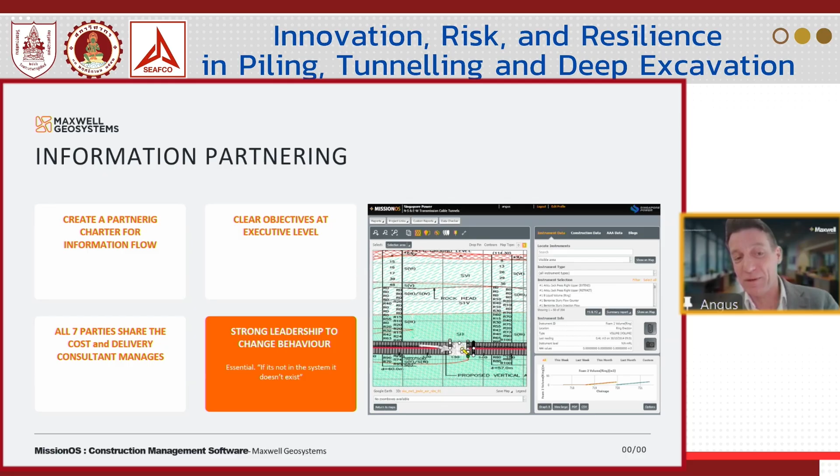And one of the things that it did was the things that McKinsey have identified now in their talk about digital control towers. It created granular data available for engineers, simple to see, simple to visualize, give them access to it so they can really prove how good they can be as engineers. And it's presented in digital twins, so you can see exactly what's going on. Even the engineers in the audience now can see what's going on in this job. You can see the drawdown here, the diaphragm walls and the shafts, the movements, etc. And just by having that, we can identify potential problems easily.

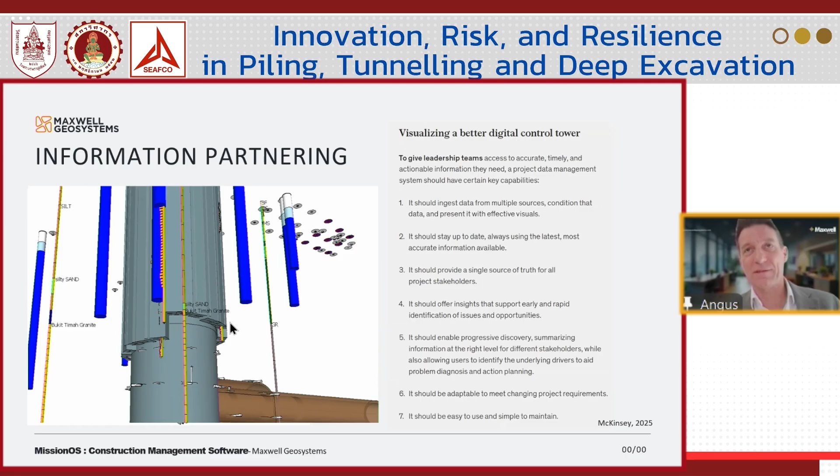Here we can see that there is a silty sand layer at the top of the Bukit Timah granite, which actually has a tendency to flow under hydraulic gradients. The diaphragm wall here was too short. So they recognized this early, managed to do some grouting down here at the bottom of this D-wall before the excavation got to that level, and stopped having a major sand flow event at this point. So really good to be able to have all this data together so you can see the relationships.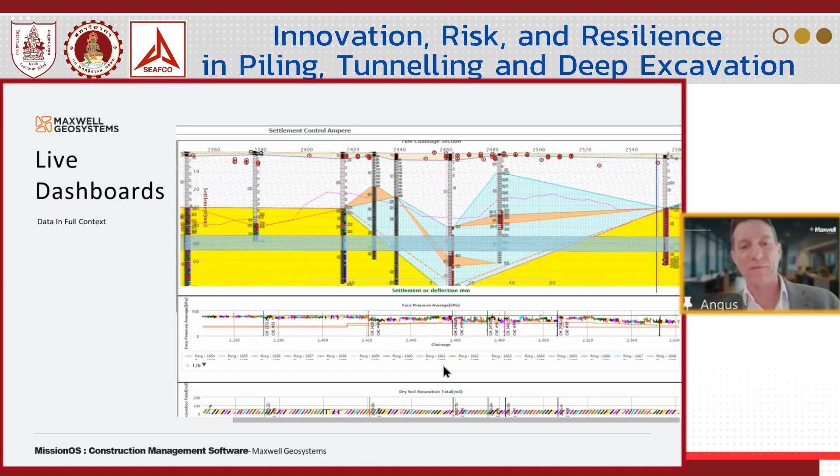So this is the actual dry soil excavation volume stamp here. You can see the level of control that we have. It's all open, willingly given by the people for the betterness of the project. So 2020 to present, collaborations and teamwork.

Now you've already heard about the DTSS2 project from Banjo, another very, very successful project where a single system is provided by the client for the benefit of almost 30 contractors on the project. And on this project, actually, it was the engineers from the contractors on the SPPA job who then joined DTSS2 and were very keen to promote the same system on the job.

Now, I don't know whether Banjo mentioned, but this happened to occur right in the middle of COVID, and for maybe a year or two, nobody could go to the office. So this system became everybody's virtual office for the project. They could see everything about the project and run all those everyday things they needed to do. So very, very successful. And it was then taken on Changi. So Changi Airport, the tunneling across the airport there was done very successfully using the same system.

Great level of transparency. So just to say a sort of a status in terms of where the systems are at the moment, I put a little dot in here in terms of separate systems, not integrated. Currently, I think in Thailand, we're still having separate instrumentation systems and a separate TBM system, and they're not really put together yet. Same in the Philippines, same in India, our experience. The IDMS plus TBM data is happening now in Hanoi, in KVMRT, obviously down here.

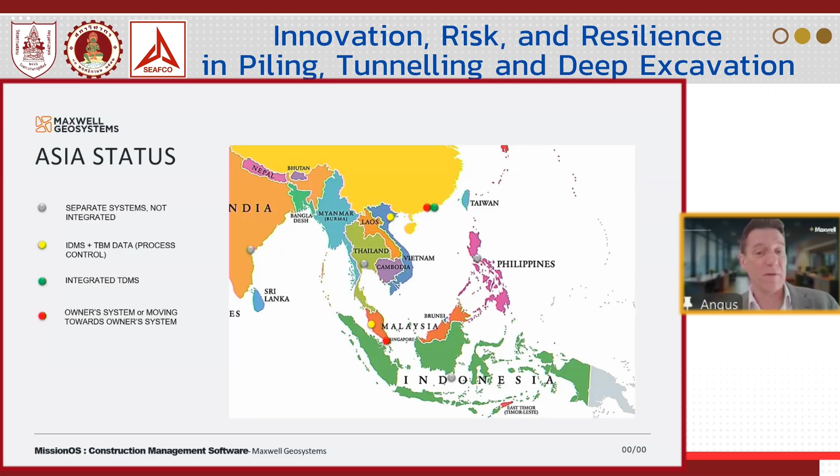And then in some places, you can see that the owners are moving towards creating an owner system and putting that in place for the benefit of everybody on the project. And globally, just looking at the red here, you can see that more and more people are recognizing that the owner can implement the system. Now, it used to be that the owner didn't want to implement the system because of the risk of implementing a system. You don't want to have a problematic IT job as well as a problematic construction project. But now these are mature; they're off the shelf, so there is zero implementation risk of putting these things in place now. And this is sort of a change we're seeing in a number of places.

In fact, the latest version of the Joint Code of Practice talks about the benefits of having just such project systems in place. So a last word about managing uncertainty. Okay. So having stuff in one place, is that ready?

Okay. So one thing about having all this in one place is you can actually see the relationships between different sets of data. This is a demonstration platform, but real data, showing how we can create a digital twin in real time with the latest information from the project, and it will put everything together into one model. Now, as part of that model, we can create ground models, which actually give a statistical assessment for what's likely to come ahead.

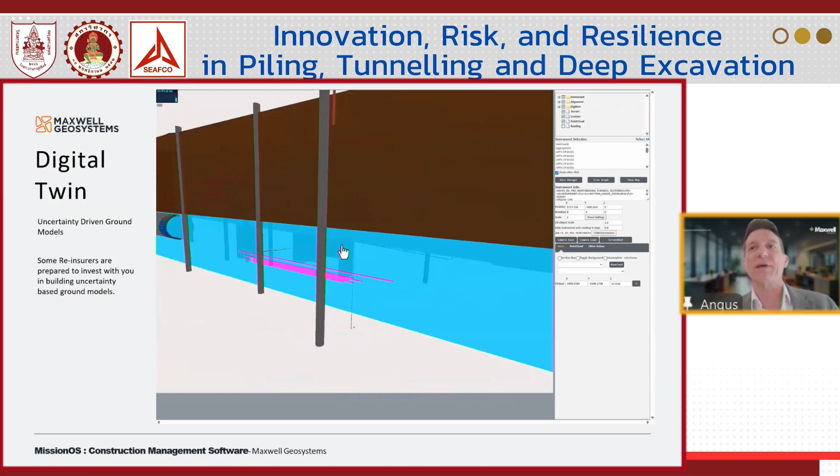Now, this is from Kuala Lumpur. This is an example of a trial section of the VD TBM machine. You can see that we've got a wall cut through a volumetric model showing the RQD, and also because this is limestone, we can look at the probability of there being voids. So this is a statistical calculation that says what's the probability of there being voids, and you can see that there is a high probability of there being voids along this tunnel alignment.

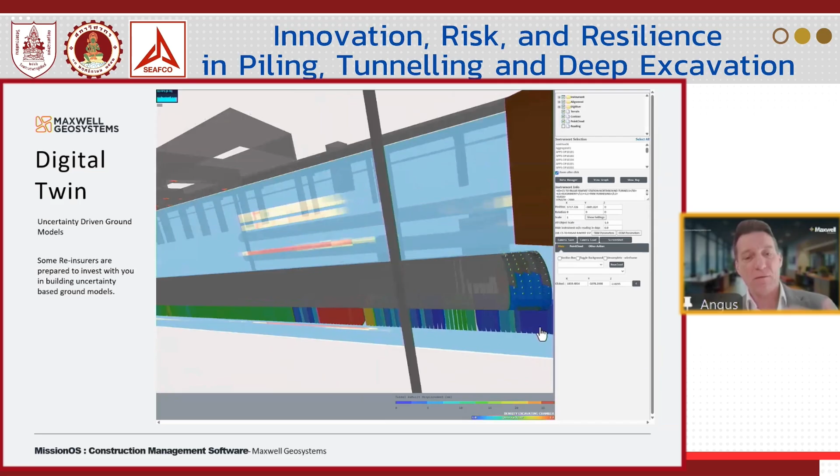Now I can also look at the slurry density in here. So if I look at the density of the excavating chamber, we can see that whilst it was hit there, the high density slurry was gone on there. So it takes a while for them to do it. So this is just the trial section, but in a later section of tunnel, you would really want to have that proactive view to the ground, to be able to see what's coming. And so often on tunnels I'm on, we don't have that.

We don't have, underground, a view into the ground to see what's coming, not just in terms of the ground, but also in terms of any obstructions, or if there's a utility coming up, where it is relative to the tunnel. So this type of thing gives people the opportunity to see what's out there. I liken it to driving a car at night with the headlights off. You've got your dials, that's fine, but you can't see what's coming. And also, you don't have the navigation computer telling you where the next petrol station is.

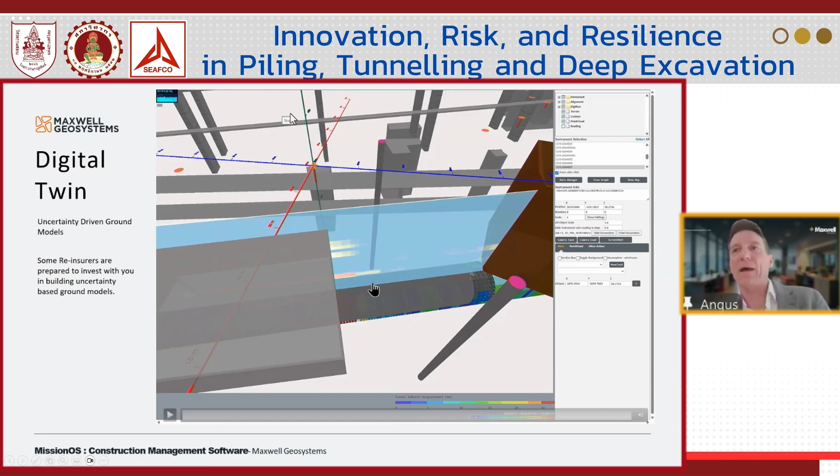So this is a real paradigm shift, really, in terms of how people can use data on tunnel projects. Now, that was going to be my last conclusion slide. One thing I wanted to show you, because it came up in one of the previous talks, is one thing that's often missing is the prediction. So I'm showing you here how within the MissionOS platform we can load the prediction from Plaxis. This is actually your design software, loading data into the system, just as if it was an instrument.

And what we can do then is combine that data as a prediction at each stage for the actual observations. And the reason this is good is because it's actually showing you the design shape of the curve. Normally, it's just a single vertical line. Now, if you have a single vertical line for an alarm line, it means the toe could kick out by 50 mil and you wouldn't have an alarm. So this is actually showing you what we expect the actual profile to be.

And the same is true for settlement. This is the settlement above a tunnel, and this is distance from the tunnel face. So we're behind the tunnel here, the tunnel comes to the face here, and then it goes after. So this is settlement over the top of the tunnel. And what we can do is create models in here that calculate that longitudinal Gaussian based on some parameters, the tunnel diameter and depth, but also a trough width parameter K here.

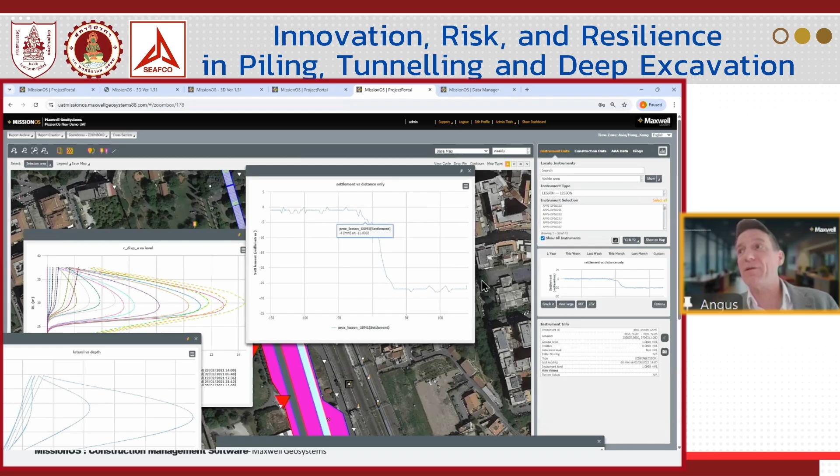So if I go into this model here, I'll just show you. If I go into this proximity graph here, I can actually add a prediction. So if I go into a proximity settlement here, I can create a prediction. And what we do is map a predicted value to the observation using a trough width parameter. So let's just make this trough width parameter 0.4. Let's say that was the design prediction.

So what I get there is a prediction. This is what I'm expecting to happen as the tunnel goes past, and this is what actually happened. And this gives us an opportunity to have alarms much more advanced than would normally happen. We can see it's deviated from our prediction early. So I'm just by the face here. If it's deviating, we can put increased pressure on. If we go past the face, I've still got time to put on increased tail grout pressure.

Now, this opens up the opportunity for machine learning, because based on this behavior, we can get the system to learn that that's not the right parameter; 0.8 is, in these ground conditions. How do we do that? By having design prediction, observation, and the ground all in one platform, it opens the opportunity to do a lot more machine learning, a lot more active feedback systems in the platform.

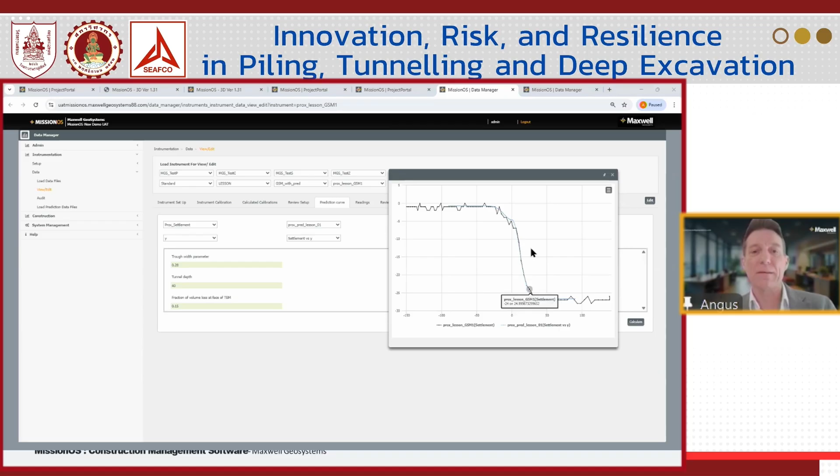So, in conclusion, passing all the risk to the contractors doesn't necessarily mean you're passing the risk, but it does mean you're passing a lot of control. And the way the data is controlled sets the tone for a project. So we recommend setting up transparent, integrated quality data systems for the project, driven by owners. On the basis of that, trust but verify, and standardize across projects, so that you can combine projects together and use that data to set benchmarks for other projects. Having data in lots of different systems makes it very difficult to use that for the future.

Investing in systems is not a risk. This is now, as I say here, zero implementation risk. It's been done many, many times now. So controlling the way data is managed opens up opportunities to streamline the project and accelerate completion. And ultimately, greater transparency reduces the risk every single time. We see this on every project we've done. Projects accelerate because the perceived risk is lower, both from the point of view of the owner and the contractor, but also anybody who is a stakeholder surrounding the project can see that it's being managed well.

And we keep being told, oh, but this is expensive. It's not. The cost of one single system versus the cost of many, many systems and the time taken for people to try and have to get this data and put it all together for their daily meetings, etc. It pays for itself. It is cheaper. It is a cheaper solution to have integrated platforms than it is to have things highly separated.

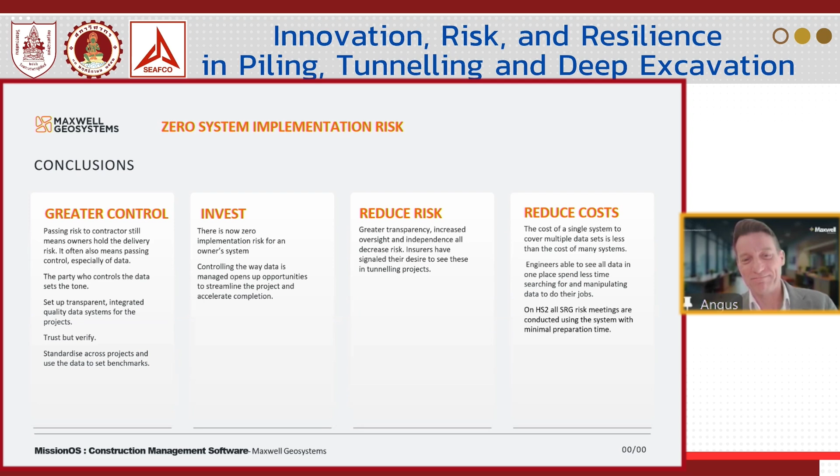But let me reflect. My professional career started at the time when the hydropower projects along the river Danube from the German border to the Hungarian border all were done by construction companies, and these construction companies had their own design offices, they had their very special technology, and they have done it very successfully. And later I have been involved in the discussion in the International Tunneling Association with regard to risk management. And I have attended meetings at the British Tunneling Society in London, where we have decided on the risk management. It makes a lot of sense to have risk management, which was at that time at the brink of the insurance companies stopping every insurance for construction companies because they had to pay much more for damages which happened in the construction than their income was. And it was logical that they have been thinking to stop insuring construction companies.

Thank you. So next, I would like to invite Kunarong to give closing remarks. Thank you to everyone who joined this seminar. I myself feel that this seminar is very interesting. We have some speaking in Thai like me, and mostly we are presenting in English. I think this is the first time for the Council of Engineers to set up this kind of seminar for both languages. I feel very happy to see all the old friends and young engineers. Some of them are the age of my son, but they will grow the country in the future. We are slowing down, so I just try to transfer the knowledge that we have collected to my colleagues at the engineering council.